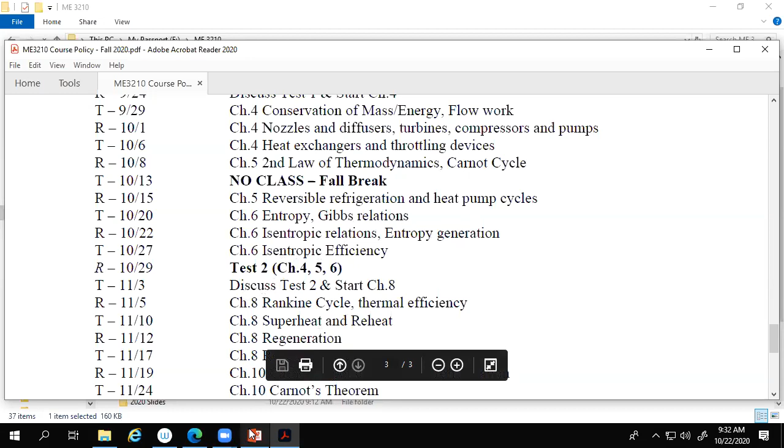Okay, so with that, let's go ahead, we've got a lot of material to cover today. So we are back into talking about entropy. We covered the entropy discussion for control mass last time, and now we're going to extend to control volumes. We just pick up the mass flow terms, and everything else stays pretty much the same as we've already described.

So like mass and energy, entropy can be transferred into or out of the control volume by streams of matter. So last time, for the control mass, what did we have? We had a way you could increase or decrease entropy in the system by heat transfer, right? We could increase the entropy if we had heat coming in. We could decrease the entropy of the system if we had heat coming out. So that was a plus or minus.

And then we had the production term, which we can actually manufacture—irreversibilities manufacture entropy. So if we had dissipative effects, friction, turbulence, whatever inside that control mass, that was going to produce entropy. That term could only be at best zero or positive. It could not be negative because you cannot destroy entropy. You can transfer it in and out, but you can't destroy it.

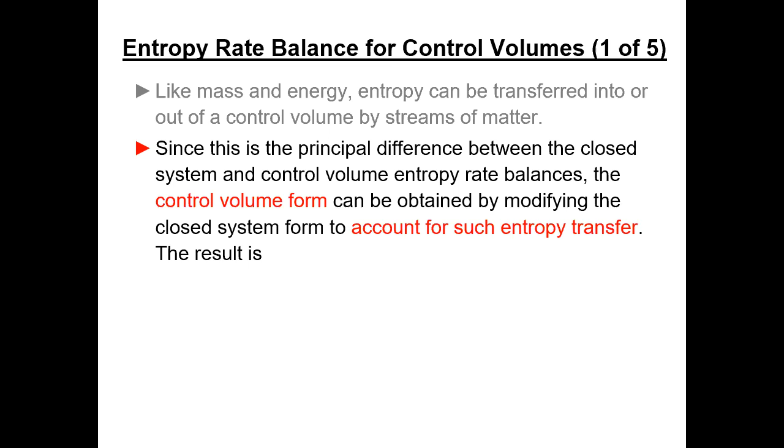Okay, so now we're going to extend the discussion to control volumes, and we're going to have streams of matter, mass flows into and out of the control volume, and they will carry entropy either into or out of the control volume with them. Since the flow of mass is the principal difference between a closed system and a control volume or open system, in terms of entropy rate balances, the control volume form can be obtained by simply adding those mass transfer terms to the closed system equation we had before, to account for the entropy transfer.

So basically, we take the same equation that we had. On the left, we've got the transient term: if there is a rate of entropy change, ds cv dt, evaluated at some particular time t, and that has to equal all of these other terms.

And so we've got the heat transfer term, the summation over J of all the heat transfers coming in divided by the temperature on the boundary at which that heat transfer occurs, okay? So usually it breaks down into we're putting it in on the top, taking it out on the bottom, something like that—maybe we've got a stray on the side. We have an amount, and then we have a temperature on the boundary, and we simply take that heat transfer rate and divide it by the temperature, and that's the rate at which entropy is either entering or leaving the control volume with the heat transfer. So that's pretty easy.

And then we have a summation over I, the index of the mass flow rate entering, times the specific entropy entering. So if you have one location where you've got mass entering, then you've got whatever that mass flow rate is times that specific entropy. If you've got 3 locations where they're entering, you have to treat each one separately—you have to know all 3 mass flow rates, and all 3 specific entropies, and simply put it together in the equation.

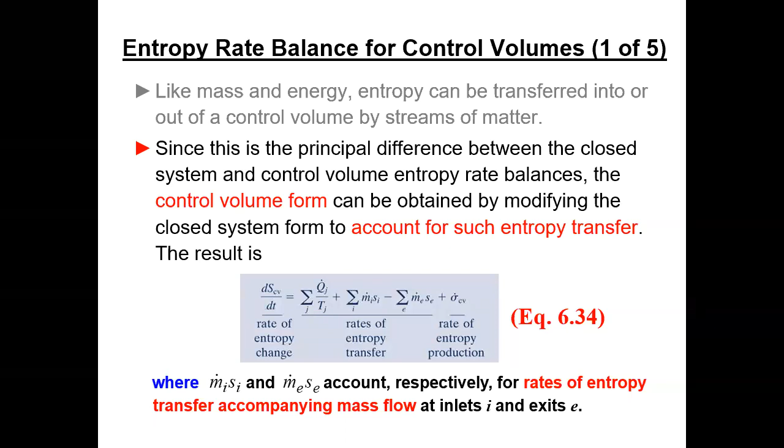And that's really about it as far as the entropy rate balance equation is concerned. That's 634, I guess, in your text.

And then we look at the special cases. How can we simplify? Well, if we say those golden words, steady state, when you hear steady state, your life just got easier, because the transient problems are harder. They just are. You've got more things to consider, time rates changing and stuff like that.

But if it's steady state, you get to set the dSCV/dt term equal to 0, and then you've got all the other stuff on the right-hand side of the equation as already described. And then for many, many practical components, simple turbines, pumps, compressors, nozzles, diffusers, all that stuff.

We oftentimes have 1 inlet and 1 exit. He'll probably talk about it more. All right, okay, so let's see here.

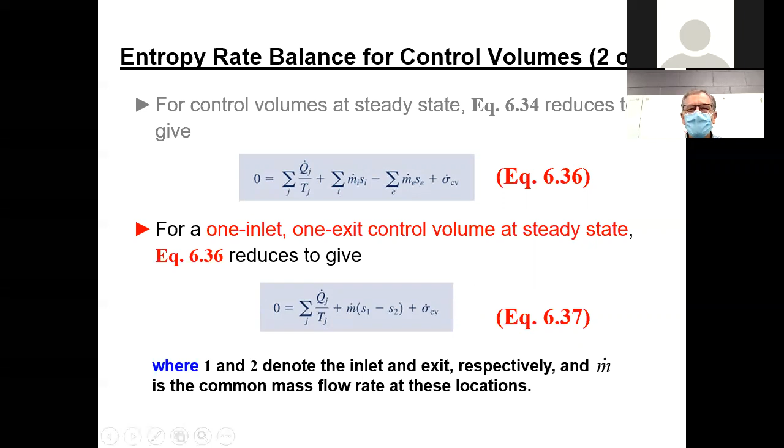I labeled my points differently than even he did. Oh, it's not even in these. I labeled it the same way as what was labeled on the homework, just so I could keep things straight. Take care of that. I didn't hear, did he have a question? He was just talking? Okay, sorry, Casey. Where...

Was I? Okay, well, so for all these fairly common devices, 1 inlet, 1 exit, then the summations go away. And if it's steady state, you got the same mass flow in and the same mass flow out, so you just have 1 mass flow that you can factor out. And so you get the mass flow rate times S1 minus S2 plus production, plus the summation of the heat transfers over the temperatures. There you go, simplifies down pretty nice.

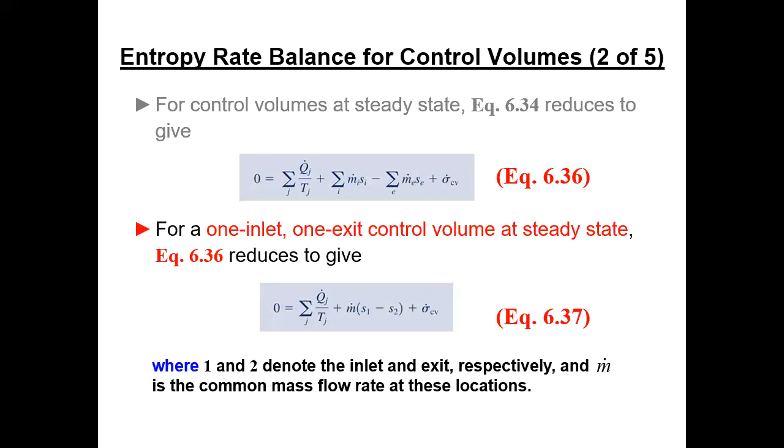Okay, so let's do a little example here. So we got some water vapor, some steam, and it enters a valve at 0.7 bar and 280 degrees centigrade, Celsius, and exits at 0.35 bar. So we're dropping pressure, dropping it in half, I guess. If the water vapor undergoes a throttling process, determine the rate of entropy production within the valve, in kilojoules per kilogram per K, which is entropy per kilogram of water vapor flowing.

So that would be the specific entropy production. And B, what is the source of the entropy production in this case? Okay, so we got a little picture over there.

And it's just a throttling process, and you see down here that H2 is equal to H1. So if you remember, the throttling process is my favorite process. It's the one where the first law, when you throw out kinetic and potential energy changes and you do steady state and you throw out the heat transfer, you wind up with H1 equal to H2, or H2 equal to H1. The enthalpy doesn't change across that valve after you make all those assumptions.

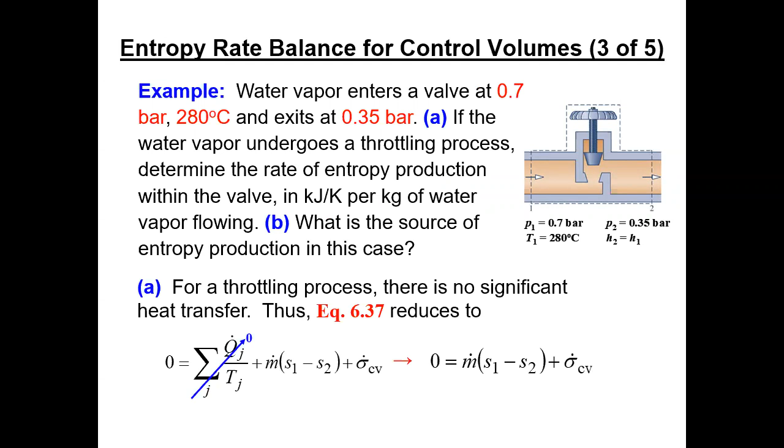It's pretty easy, and then we go to the tables and start looking up stuff. State 1 is just a direct lookup from the tables, at 0.7 bar and 280 degrees C. If you have any question, it wouldn't be bad to go out on your own and verify that you see the same numbers. But you should look up from the table: H1 is 3035 kilojoules per kilogram, and S1 is 8.3162 kilojoules per kilogram per degree K. For a throttling process, H1 is equal to H2.

Now here's where these things aren't hard, but they're a pain in the rear because you always have to interpolate for the second state. As we go into this test, you need to dust off your interpolation skills. This would be a good opportunity to go do the interpolation in the table and make sure, one, that you're clear on how to do it, and two, that you can do it quickly. Because if I give you 12 problems on a test with 80 minutes, you're not going to have time to re-teach yourself how to interpolate. If you do, pardon the expression, you're going to be screwed because you're only going to get through half of the test. That's on you. At this point, you're supposed to know how to interpolate, okay?

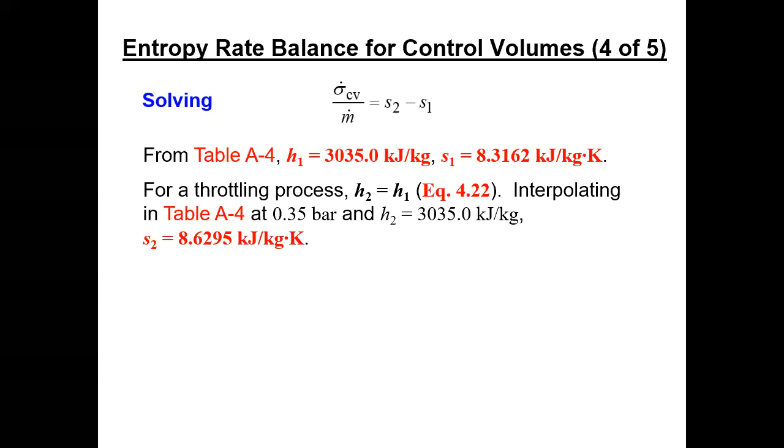All right, so anyway, what you know about state 2 is you know the pressure and you know the enthalpy. When you know the pressure, hopefully you can find it in the tables at 0.35 bar. But you're not going to find that exact enthalpy, most likely. It's very unlikely. So you're going to have to take that 3035 into the tables at 0.35 bar and interpolate in order to determine what that entropy is. Anyway, that's just the way it works.

Okay, and so just plugging all this into our simple little equation, the production term, entropy rate of production for the control volume divided by the mass flow, is equal to just the difference in those. So it's positive 0.3133 kilojoules per kilogram per degree K.

So what's that tell you about what's going on inside the control volume? Is it reversible, irreversible, or impossible? Well, it's not impossible because entropy increased. It's not reversible because entropy increased. So we have irreversibilities present in the control volume. That's what that tells you. And it's possible for this process to proceed, to happen.

Okay, and then if you go back and look at section 531, they list all of the different types of irreversibilities: friction, unrestrained expansion to lower pressure, and there's a whole list in there. I can't remember everything off the top of my head, but there's a bunch of stuff. So, this one would fall under the category unrestrained expansion to a lower pressure, because once you go to that lower pressure, you can't blow a magic whistle and get it to run back upstream to a higher pressure. There's nothing in an energy balance that would preclude that, but it's not going to happen, and that's the second law aspect of it.

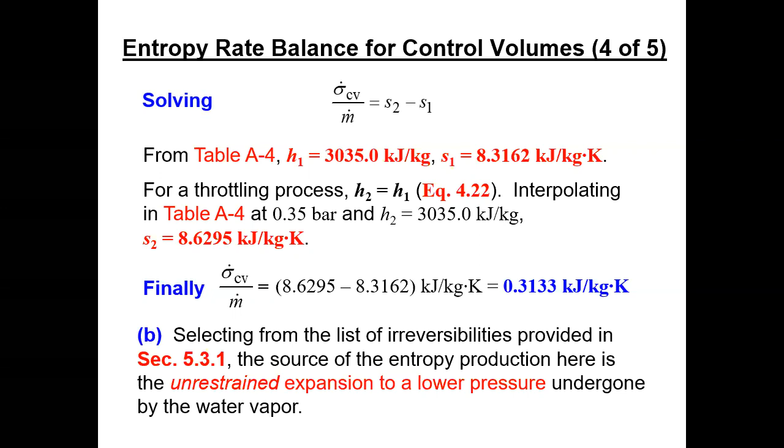Okay, comment, and this is pretty good. Every once in a while, the author rolls in some discussion here that I really like. So we'll read it here: the value of the entropy production for a single component, such as a throttling valve considered here, often doesn't have much significance by itself. The significance of the entropy production of any component is normally determined through comparison with the entropy production values of other components that combine to make up an integrated system.

So, you know, like we have throttling valves in refrigeration systems. We have a compressor, we have a heat exchanger called a condenser. We go through a throttling valve to drop pressure. And when we drop pressure on that refrigerant, it gets really, really cold. And then we put that through another heat exchanger, we blow air across it, and we get air conditioning out of it.

And that then boils off any liquid, and we get superheated, and we go back in the compressor, and around and around and around in a cycle.

Okay, so if you're looking at this cycle and you're trying to make it more efficient, you want to know which component has the most irreversibilities present, because that's the one that gives you the most opportunity for improvement.

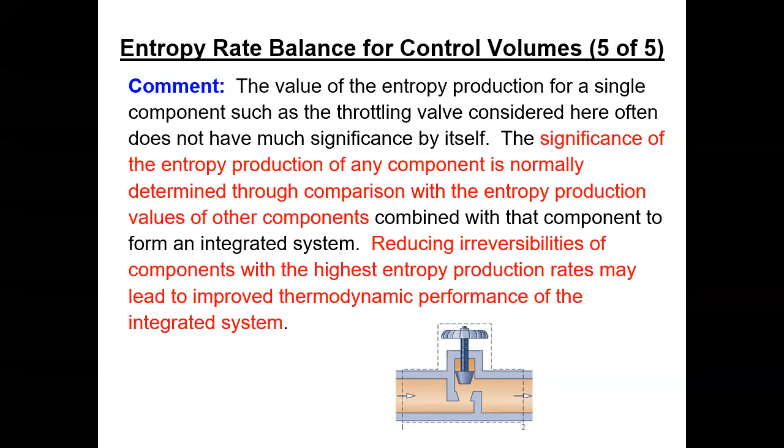Is it the heat exchanger? Is it the throttling valve? Where can I get the most bang for the buck in terms of trying to optimize this cycle? So that's where this stuff really picks up a lot of its value in terms of practical engineering applications.

Okay, so calculating entropy change. Well, my goodness, what do we got there? The old TDS relations. And he got the sign right on the second one. I eventually got the sign right after we edited them all in class last time.

So the property data provided in all those tables, A2 through A18, similar computations for other substances and numerous important relations among such properties established using the TDS equation. We developed these in detail last time, so I'm going to skirt through this pretty quick, but they're just ubiquitous. Those little rascals show up all over the place in thermodynamics.

610A and B are written for a unit mass. So we've got the specific values of entropy, internal energy, specific volume, and enthalpy, but you've seen those before.

So as an application, consider a change in phase from saturated liquid to saturated vapor at constant pressure. So this was the old piston cylinder. I think early on in the course I told you, you're going to hear about so many different piston cylinders because that's the main component we use in describing all of this stuff. The frictionless piston that runs up and down so we can do something at constant pressure.

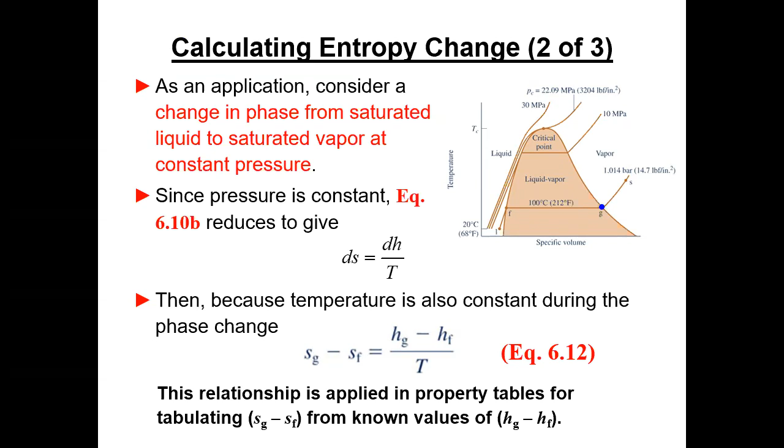Which is 373.15 Kelvin. So you can just go to table A2 at 100 degrees C, and you look up Hg minus Hf, which is the distance across the dome in terms of enthalpy coordinates. So it's the enthalpy at this point minus the enthalpy at this point.

He wrote out the difference here in terms of Hg minus Hf. Sometimes we just call that HFG. So if you see H with a subscript FG, that's shorthand notation for this, and this is tabulated in the table. So in the tables, they'll do this subtraction for you and go ahead and tabulate it, which is nice. It keeps you from having to take the vapor enthalpy and subtract the liquid enthalpy from it.

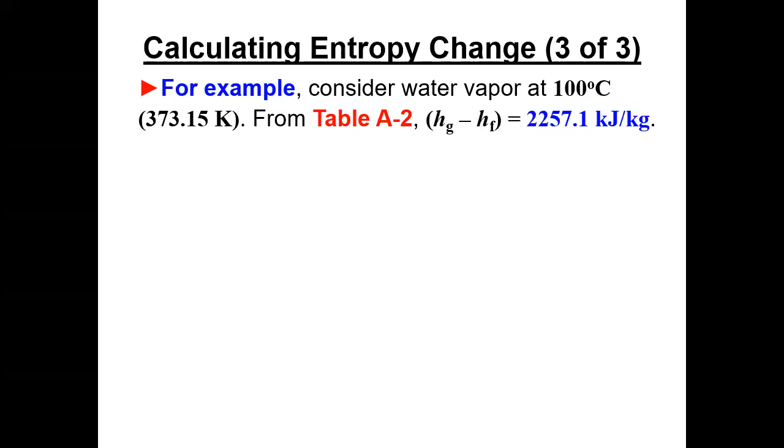Okay, so then he's just showing that if I take that HFG and divide it by the temperature in Kelvin, I get the entropy change, or SFG, however you want to put the subscripts, is equal to 6.049. Calculated, and you go in the table, and guess what? It's 6.049.

So just demonstrating how those tables get put together. Okay, so next, the TDS equations are applied to two additional cases.

We ran through these last time too, but I think hitting them again is pretty important. What you're going to find when you start prepping for this test is when you get to chapter 6, you got a boatload of equations. If I assume this, I get this. If I got an ideal gas with constant specific heats, I get this. If I get this, I get this, I get this. So you really have to be clear. You can write them out on a sheet, or since it's open book, you can look at them in your textbook, but you just have to be clear that you understand under what conditions I can use which equation. You're just going to have to review it to the point that you become comfortable with it. But so we'll hit the incompressible substance and then the ideal gas situation again.

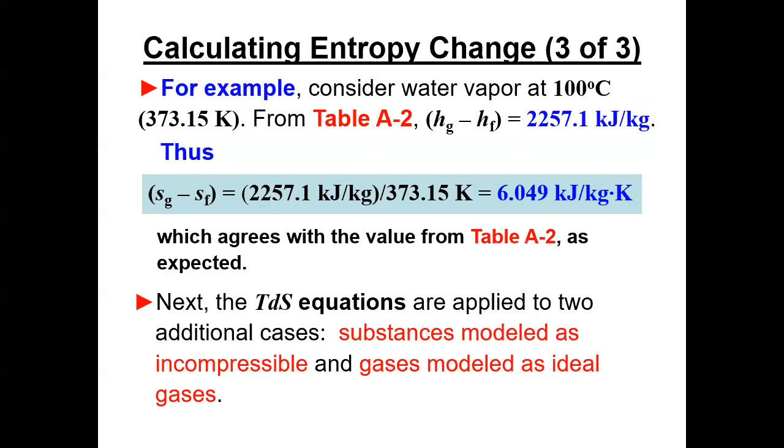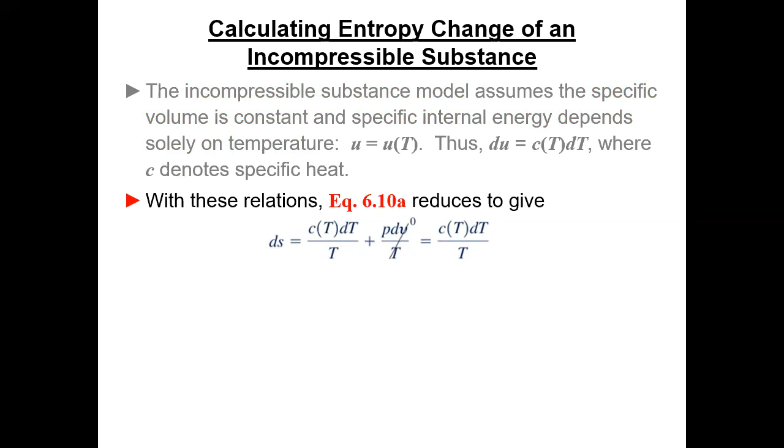Okay, so we stick this into our relations for entropy. This is the TDS equation, 610A. So TDS is dU plus PdV. For dU, we put in C of T dT over T, and because we're incompressible, the dV is 0, and so it simplifies to that.

And then on integration, we would get this. And then if we're willing or able to assume a constant specific heat, then the temperature terms integrate into natural log of T2 over T1. So when you see these relations, you see these little parentheses things over there, those are the conditions under which you can use that expression. You have to be assuming incompressibility, and you have to be assuming a constant C.

So if you had a temperature range for that C, and you wanted to use that, because it's simple and easy, what you would do is if you have a table that gives C as a function of temperature, you take the average temperature, and then you evaluate the C right in the middle of the range, or you take the average C based on averaging your temperature. And that's about the best you can do. So if you have a small temperature range, then this will be pretty good.

If I have a great big temperature range, because those specific heat functions really aren't linear, and over a big range, they move all over the place. We've got some curves of them in the appendices. So over a small temperature range, each little section of the curve is pretty close to a straight line, and so you get a pretty good average. But if this thing is moving all over the place over a big temperature range, then this isn't going to work very well.

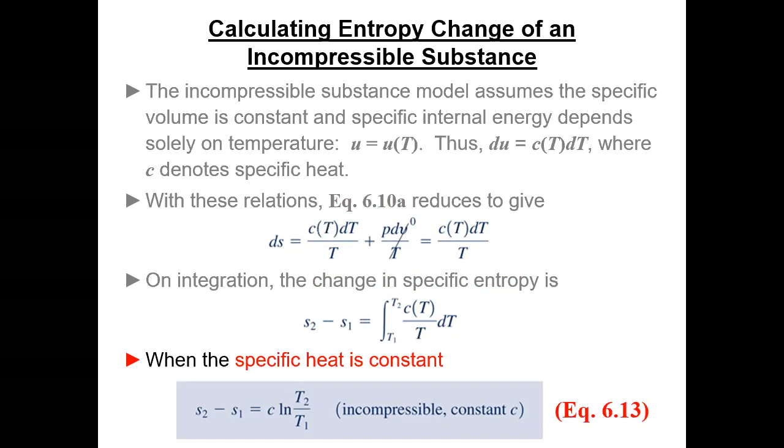Okay, so this is incompressibility, and now we're done with that. So we have that relation.

Now we're going to move on to the ideal gas model. Remember, we made these assumptions: we used PV equals RT, and the same thing for internal energy as a function of temperature, and enthalpy as a function of temperature.

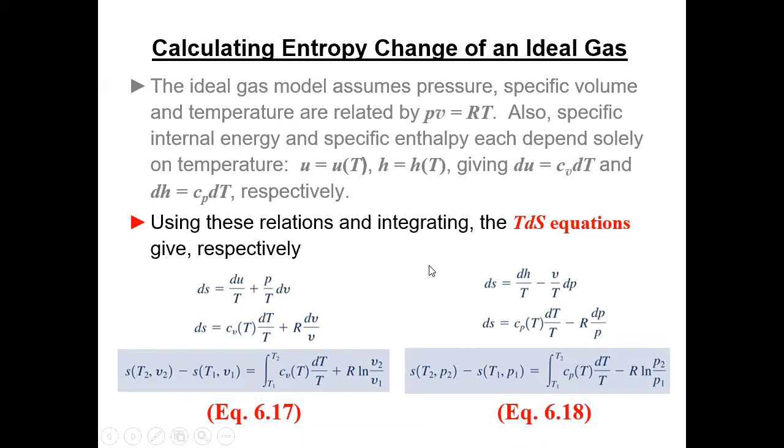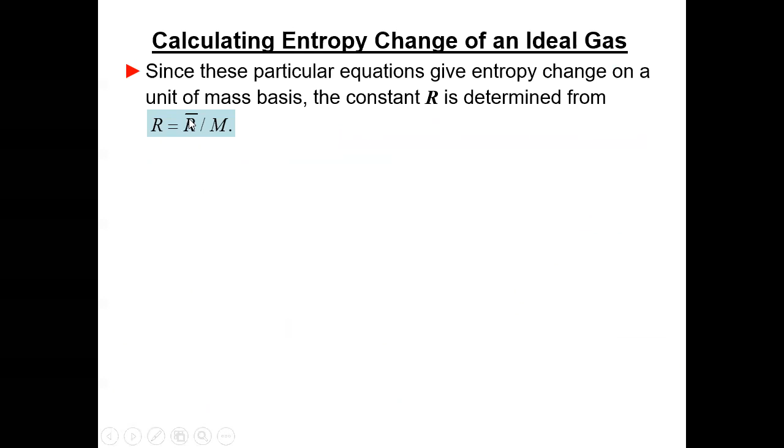So you should be pretty good on that, we've been through it a couple of times. Just to recall, these R's are not R bar, that's the specific gas constant, which is universal divided by molecular weight. We should be used to that. And we know Cv and Cp are functions of temperature for ideal gases.

So if we're going to really do this the best way we can, we need functions, and you have functions for these things in your appendices. In fact, one of the homework problems actually inserts one of those functions and does the integral.

For several gases modeled as ideal gases, including air, CO2, CO, O2, nitrogen, and water vapor, evaluation of entropy change can be reduced to a convenient tabular approach using this s superscript 0 as a function of temperature. So for these gases in this table, when you see these s superscript 0 values, they have done this detailed integration for you.

Using this approach will get you a much better answer than assuming a constant specific heat and doing that integral into the log of T2 over T1 and just multiplying by that specific heat. So they define this as the specific heat at constant pressure as a function of temperature divided by temperature, times dT.

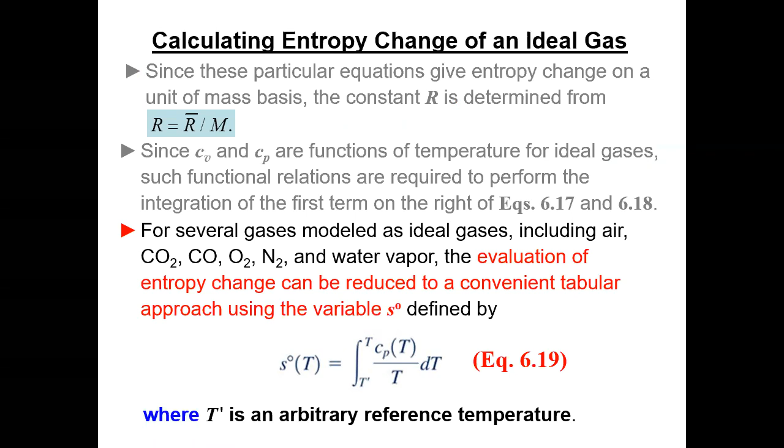It happens. So then when we plug this into our expression for the entropy change for an ideal gas as a function of temperature and pressure, for the specific heat temperature integral, we just look up the S superscript 0 at T2 minus S superscript 0 at T1, and subtract off the specific gas constant times the log of the pressure ratio. Just make sure you've got absolute pressures and you're good to go. So that's really, really nice.

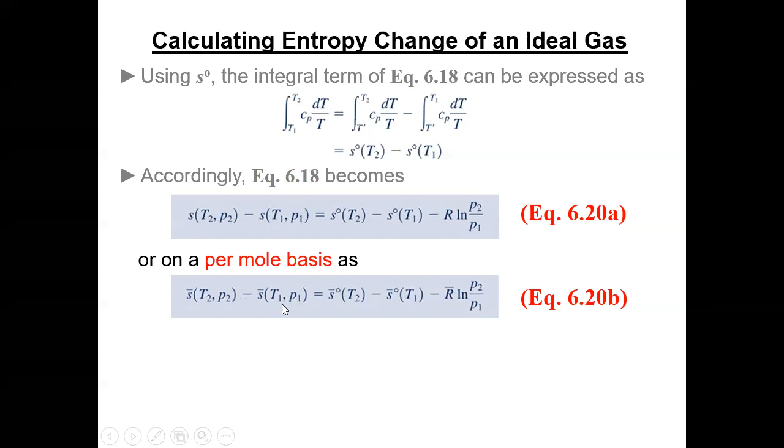For some of these gases, it may be listed on a molar basis instead of a pound basis. On a molar basis, you just have to realize you're getting the entropy change per unit mole instead of per pound, or per mass, kilogram or pound. So you'd have to divide by the molecular weight to convert that. The R then is the universal gas constant times the natural log of the pressure ratio. So that's pretty good.

He's just talking about the tables, and again, some of them are in terms of kilogram or pound, and others are in terms of moles. A23 is in terms of moles, A22 is in terms of pounds. So you just have to be a little careful on the units.

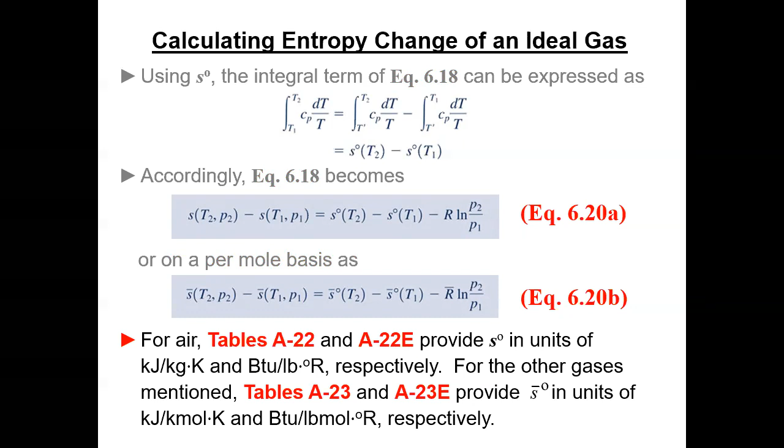Okay, so let's do a little example of this. Let's see, we want to find the change in specific entropy, units kilojoules per kilogram per degree K, of air as an ideal gas undergoing a process from 300 Kelvin and 1 bar to 1420 Kelvin and 5 bar. This looks like a big-time compression process.

Well, so here's a cut from table A22. We see at 300K, and that superscript 0 really indicates it's like a zero pressure value, because pressure doesn't come into play here. We have a separate term that accounts for pressure. So you find 300K in the table, look up S superscript 0, 1.70203. Come over to 1420 Kelvin, we get 3.37901.

Plug it in, so there's the numbers, and this is the subtraction of those. This is the specific gas constant, R bar divided by molecular weight, and this is a log of the pressures. Bingo, you do all the math, and you get 1.215 as the entropy change between those two states for that process. Not too bad.

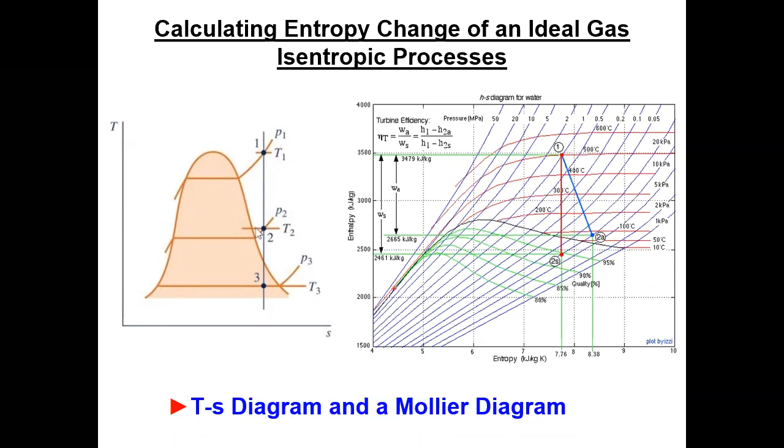And those are specific entropies. So let's see, this is looking at an isentropic process. If this is just an ideal gas, or we're out here in the vapor away from the saturation dome, say we're going from 1 to 2, an expansion, we're going down in pressure. This is a line of constant specific volume going through that point, a line of constant temperature, and a line of constant pressure. So we see the same kind of lines drawn through both states.

So if it's isentropic, that means the entropy change is 0. We can take these expressions and use them to solve problems. We basically have 4 variables here: T1, T2, P2, and P1. If I know any 3 of them, I can find the 4th from this relation. For example, if I know T1, P1, and P2, I can solve for the S superscript 0 at T2 term, then go into the tables and interpolate to find the temperature. That's the procedure, but that's obviously for isentropic processes.

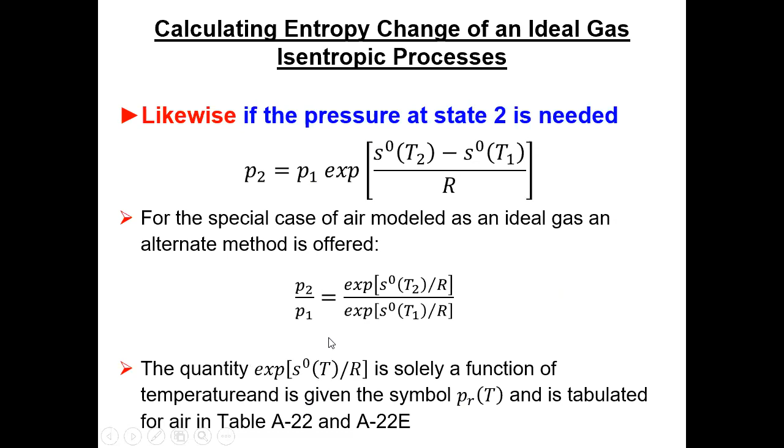If we work on this a little bit using our mathematics, we can write P2 over P1 as the exponential of S superscript 0 at T2 divided by R, divided by the exponential of S superscript 0 at T1 divided by R. Well, guess what? This quantity is tabulated for you in the tables, and it's given the name P sub R of T. So you look up this, which means we can rewrite this expression as this.

So this was really handy. You just look up this, and it's just a number to you, but this relationship holds for either an expansion or a compression process, whatever. So P2 over P1 equals PR at T2 over PR at T1, but only if it's constant entropy and only for air, because this is only tabulated for air. You won't find it for any other gas.

We'll have an example here in a minute. They've also done this sort of thing for specific volumes and temperatures for two states having air—the same specific entropy can also be developed. Again, isentropic, air, ideal gas.

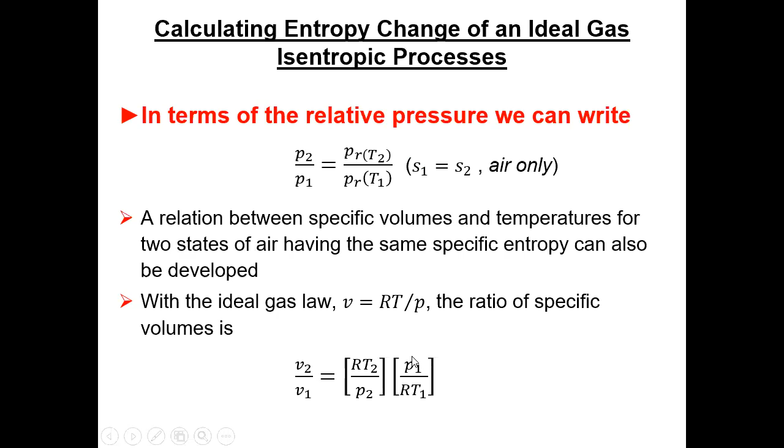So if you write this ratio, V2 over V1, just apply the ideal gas law and write it for V2, then write it for V1 and flip it upside down because we're dividing. We get that, but because it's isentropic and an ideal gas, where we have this pressure ratio P1 over P2, I can substitute in PR of T1 over PR of T2, because that ratio is the same. And then this quantity is tabulated as V sub R of T. These are called relative pressure and relative volume.

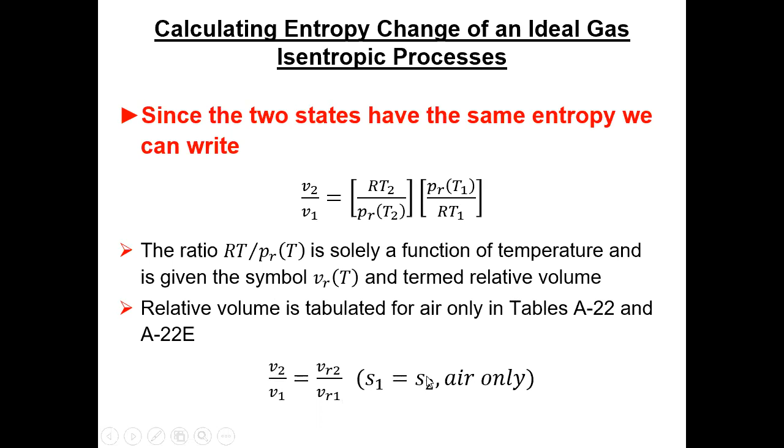Both of those show up for air in tables A22 and A22E. So V1 over V2, or V2 over V1, is VR2 over VR1. Again, constant entropy and only for air. So those are actually pretty handy to use.

Here's an example. When the entropy S1 is equal to S2, the following equation relates the temperatures and pressures, and we just read them from the table. So whatever temperature you have, for T1 and T2, you simply plug them in. For example, if you wanted to know what P2 was, starting from P1, and you know the temperatures, you can plug that in and solve very easily for P2. So it's just kind of a shortcut on some of these problems.

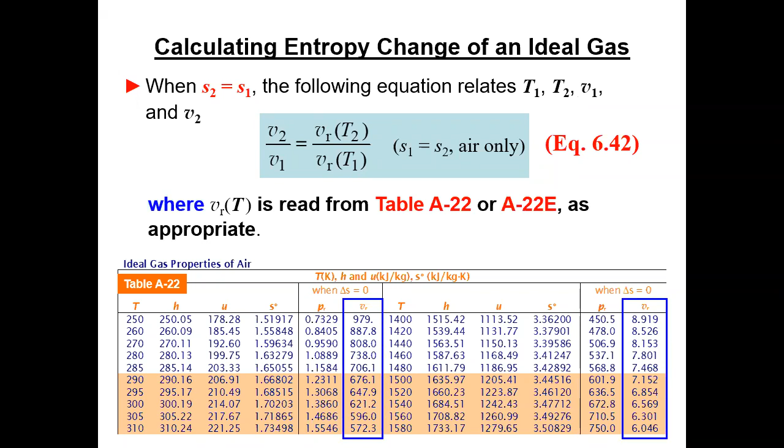Likewise, we can do it with the volumes. So that's the relative pressures and volumes.

Now we're going to do some more simplifications to these relations that we already have. I mean, how many equations do we have? We've got equations running out of our ears. You really have to sit back and look at these and be comfortable with when to use which relation, and what assumptions you're making, or you're just going to go nuts on this test because there are just too many equations out there.

Okay, so we had 6.17, we've got our temperature integral here, and we got 6.18. This one has CV, this one has CP, but basically a similar integral. If we make the assumption of constant specific heats, the CV comes out and this integrates into log of T2 over T1. The CP comes out, we get the log of T2 over T1. And those are pretty simple expressions to evaluate.

But that's an ideal gas, and you've made the constant specific heat assumption to get there. Those things get used a lot. Particularly, they can be applied to develop relations among temperature, pressure, and specific volume at two states having the same specific entropy.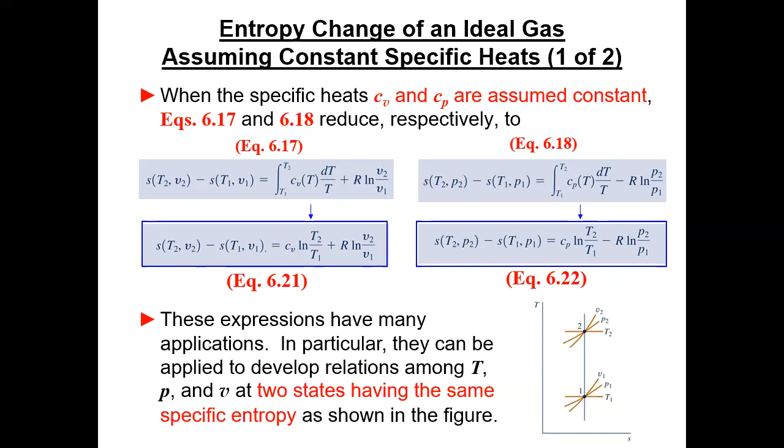All right, so there you go. S1 equals S2, we set them equal to 0. And don't forget, we also have this, where K is the specific heat ratio, CP over CV. One I remember, air, it's typically about 1.4, something like that. But anyway, so if you know the K and you know the specific gas constant, you can calculate CP and you can calculate CV. That's another good trick that you need to know.

See, these are all little individual tricks that then you have to draw on different ones on a particular problem to work your way through to a solution.

And so if you go through the math on this thing, we can solve these equations to give that T2 over T1 is P2 over P1 raised to the K minus 1 over K, where that's specific heat ratio. Or T2 over T1 is specific volume 1 over specific volume 2 raised to the K minus 1. And you see the requirements, constant entropy and constant K.

Well, you know specific heats change all over the place. So you're assuming that CP and CV are constant, because that's what constant K implies. Or you can eliminate temperature, and you can get P2 over P1 is specific volume 1 over 2 raised to the K. So I think this is the end of the equations that we have to develop. And I don't know about you, my head's swimming in equations right now. I'll be honest with you.

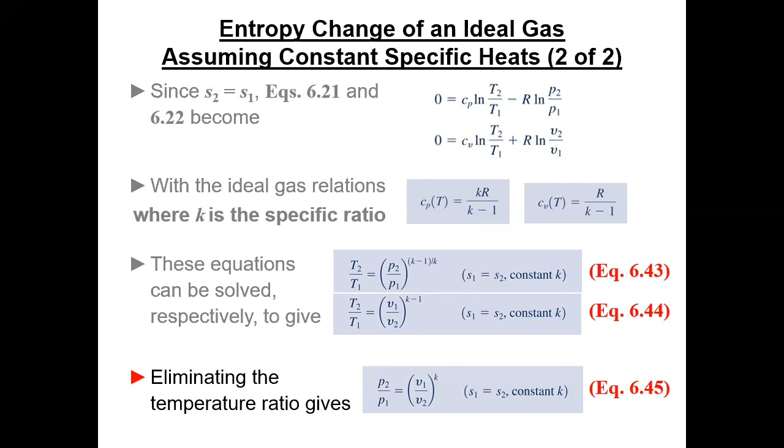Okay, so let's do some examples here. Air undergoes a process from 620 Kelvin and 12 bar to a final state where the entropy is equal, so isentropic, and the lower pressure is 1.4 bar. So we're going from a high pressure and high temperature to a low pressure. Employing the ideal gas model, determine the final temperature T2 in degrees K.

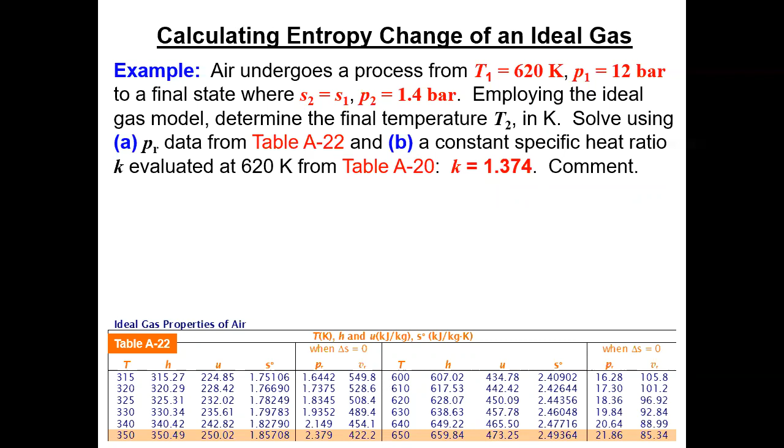Okay, so we're going to do it A using the relative pressure data, and then we'll do it with a constant specific heat ratio, K, evaluated from table A20, which is K is 1.374. And then we can look and see how that works for us.

Okay, well, now this is going to be the most accurate way, right? Because the PR values, they have integrated those specific heat functions of temperature in order to develop this. So this is probably going to give the best answer. So we look up PR at 620 and it's 18.36. Well, that wasn't very hard.

And so we know the pressures. So, I mean, look how simple this is. And you get a good answer. I mean, man, you should not shy away from using these relative pressures and specific volumes.

So we take the 18.36 times the pressure ratio, and solve that for PR2. And we get 2.142. And there we are. We're over there interpolating. You see, we've got 2.142 here. I've got 2.149, pretty darn close to 340, a little bit further away from 330. You do the interpolation, and you get 339.7 Kelvin. And that'll be a pretty good answer, okay? So that's one way to do it.

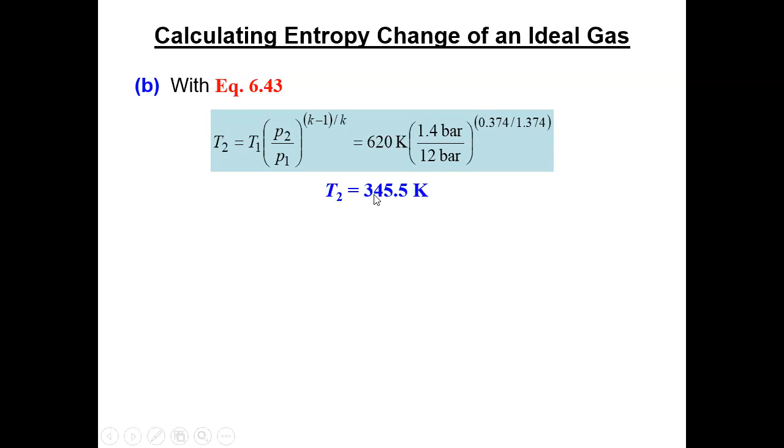Okay, we also had these relations. So this was what? Isentropic, ideal gas, constant specific heats, or constant K. So we had all three of those assumptions in order to allow us to use this. And so then we simply plug the numbers in that we have, and we get 345.5. Well, you know, that ain't just great. You know, it depends what you need.

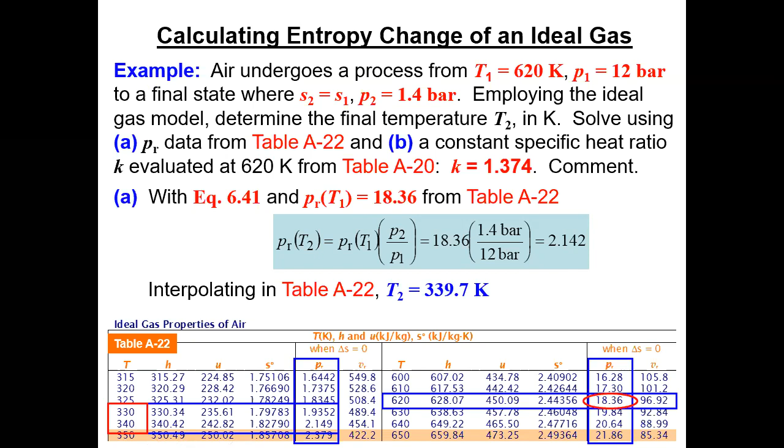Hey boss, how accurate a temperature do you want? The comment here is that the approach of A accounts for a variation of specific heat with temperature, but approach B does not.

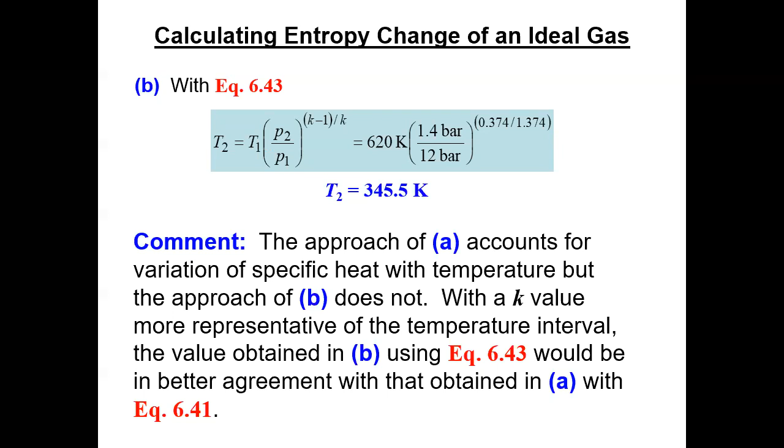With a K value more representative of the temperature interval, he's saying if you pick a better K value, you'll get a better result. But maybe you already picked the best K value you know how to pick - where did you get it? You went in the tables and looked. So if you do the first approach, why bother doing the second? You've already got a good answer. But if you do the second first, you don't have anything to compare to - you don't know if you picked a good K or not. My advice would be just do the first one. But for academic purposes, this shows you what kind of agreement you're going to get between the two different processes.

Okay, let's get on to isentropic turbine efficiency. This is one of the big uses of these isentropic devices. Before we do this slide, let's kick back for a second. An isentropic efficiency, a general description - it's a comparison of a real device to an ideal device.

We're going to have turbines, compressors, pumps - different devices. We want this efficiency to be a percent between 0 and 100, depending on however the number comes out. A turbine produces work, while a pump and compressor require work. So let's talk about the turbine first.

It's the comparison of an actual turbine to an ideal turbine, basically with the same inlet conditions and exit pressure. From a common sense point of view, is an ideal turbine going to produce more work than a real turbine? Well heck yeah, it's ideal - that's kind of the definition of it. So when I form the ratio, I put the real work in the numerator and the ideal work in the denominator, because when I do the division I'll get a number less than 1, then multiply by 100 to get a percent.

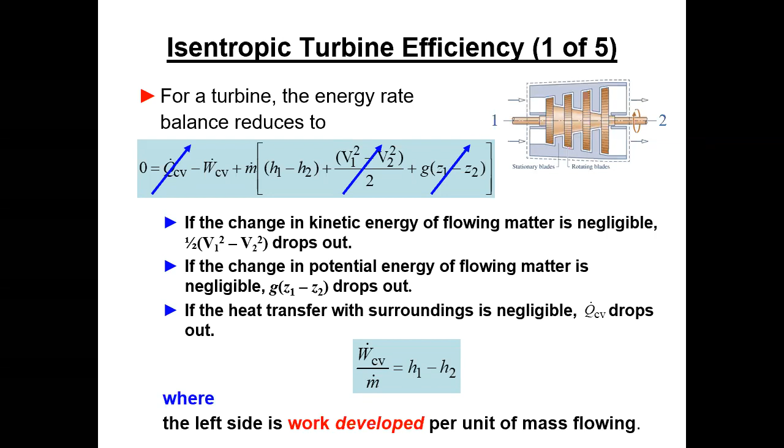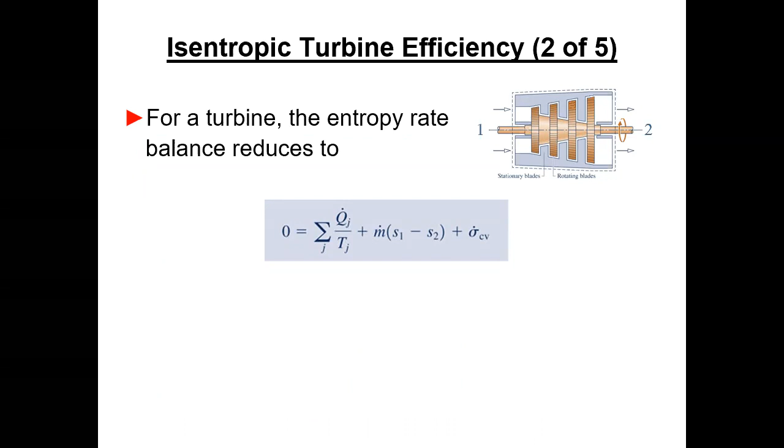Okay, now we go to the entropy rate balance. Again, steady state, dSCV dt set equal to zero. There's all of the possibilities, you know what those are now. We're adiabatic, so we don't have any Q's, so we throw out that term.

So then we just rearrange this. We take the divide through by m dot and take the S1 minus S2 to the other side of the equation, which flips the sign, so we got S2 minus S1. And so that's a production term per unit mass.

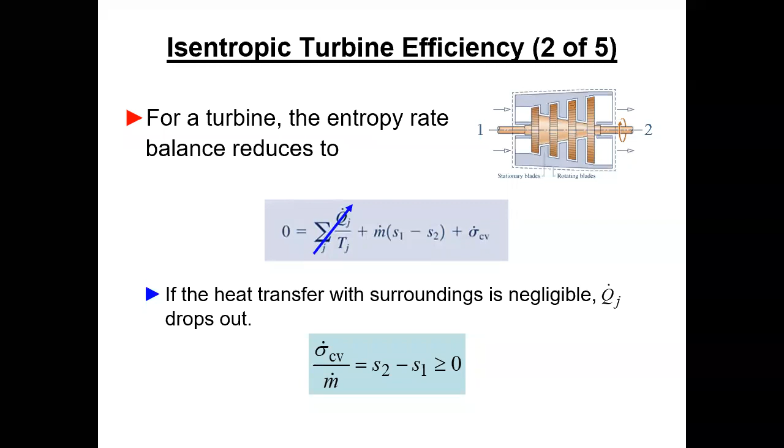So we know it can't be negative, right? Because the only way I can reduce entropy for a control volume, well, is in terms of the mass flows can do it, but I'm doing this per unit mass, is to have heat transfer, and I have disallowed heat transfer, so it's got to be positive. That's a production term. There we go.

How are we doing here time-wise? We got a few minutes.

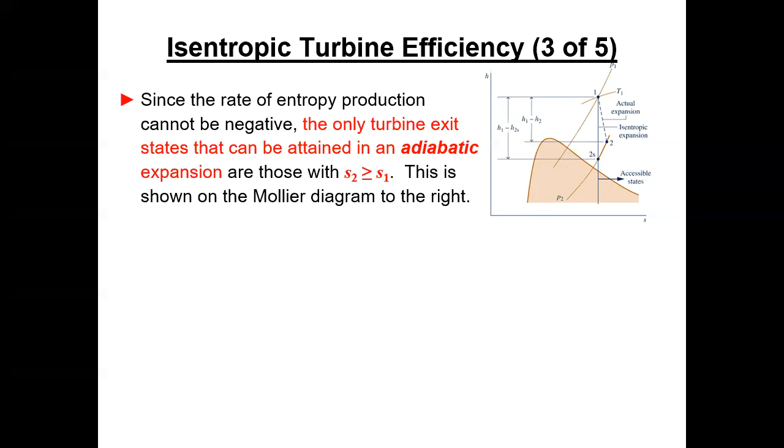Okay, so I guess we can look through this. Pretty much what I said.

2s is obtained only by an isentropic expansion, adiabatic, internally reversible, from the inlet state to the specified exit pressure. 2s would be attained only in the absence of internal irreversibilities.

So the maximum theoretical value for the turbine work, and that's what W dot CV, this little s means it's isentropic, is H1 minus H2s. So we have the same entering point for both turbines, same temperature and pressure, but I have to find the enthalpy down here, and that's the theoretical max that we could do.

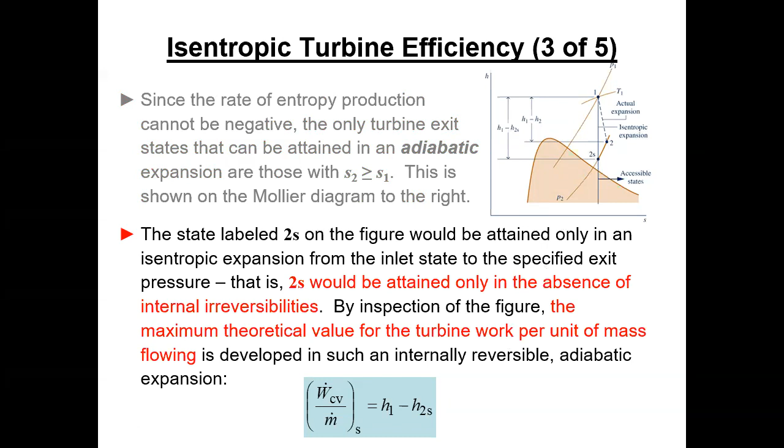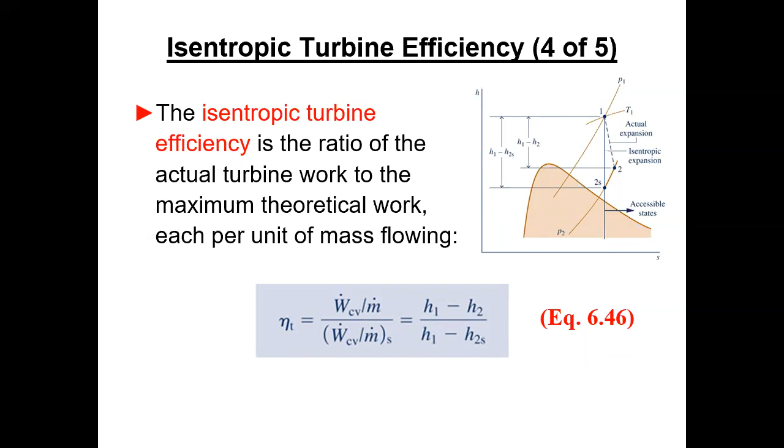Then we determine the actual work out of the turbine, the W dot CV over M dot, the M dot's the same, for the real turbine. So we have to have information that lets us find this enthalpy. We get H1 minus H2, which is the actual turbine, divided by H1 minus H2s, which is the ideal or the isentropic turbine. There you go, and there's your ratio. Multiply it by 100 and you get a percent if you want. And that's the way we do it.

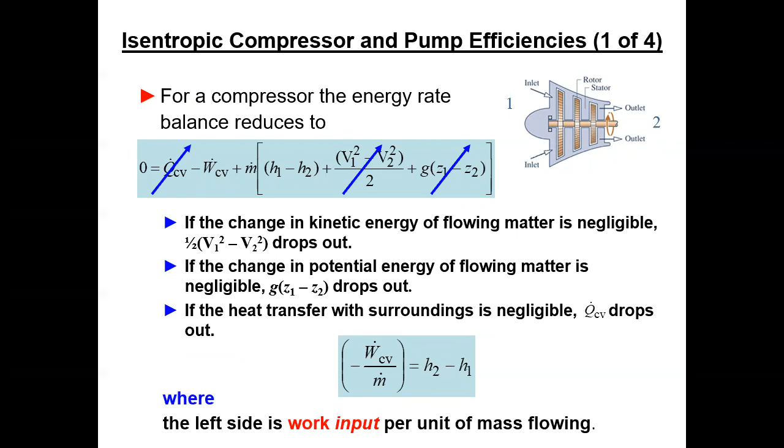So H2 - let's say this is an air compressor. The air comes in cool and low pressure, it goes out hot and high pressure. So the enthalpy at 2 is clearly going to be greater than the enthalpy at 1. So H2 minus H1 is going to be positive. That should be clear.

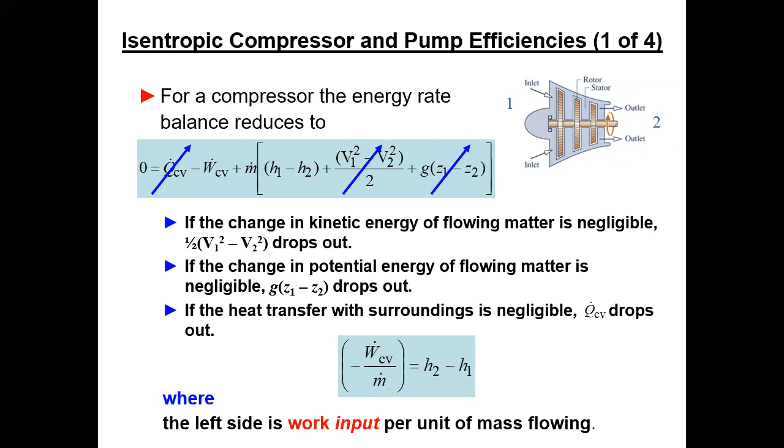When we solve for this thing, we say we got the negative of the work of the control volume. Well, if H2 minus H1 is positive, that other term's got to be positive, which means the work term has to be negative to then interact with that negative sign and turn it positive. Does that make sense? We have a motor or something turning a pump, we're putting work into the fluid, so yes, that work by definition is negative. And so those two signs will turn the left-hand side positive.